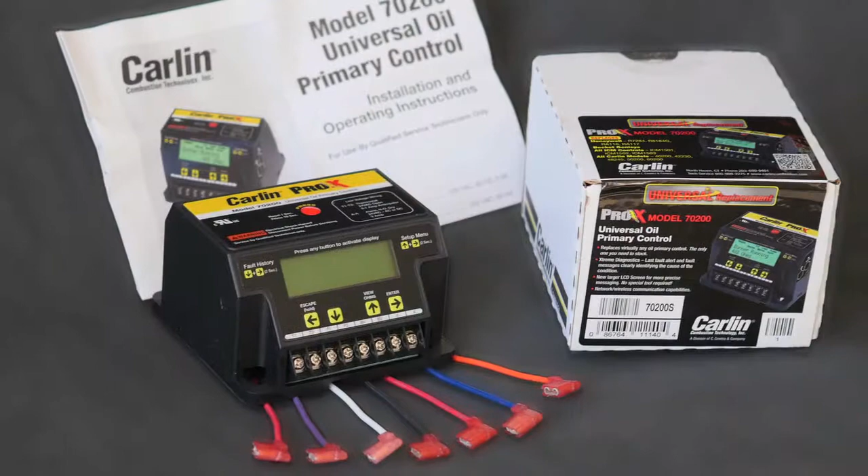Now that we have installed the ProX 70200 on our burner, we will review the setup. The state-of-the-art control is universal and self-commissioning right out of the box to fit most oil burners with and without oil solenoid valves. When the ProX 70200 is powered for the first time, an on-screen question will appear.

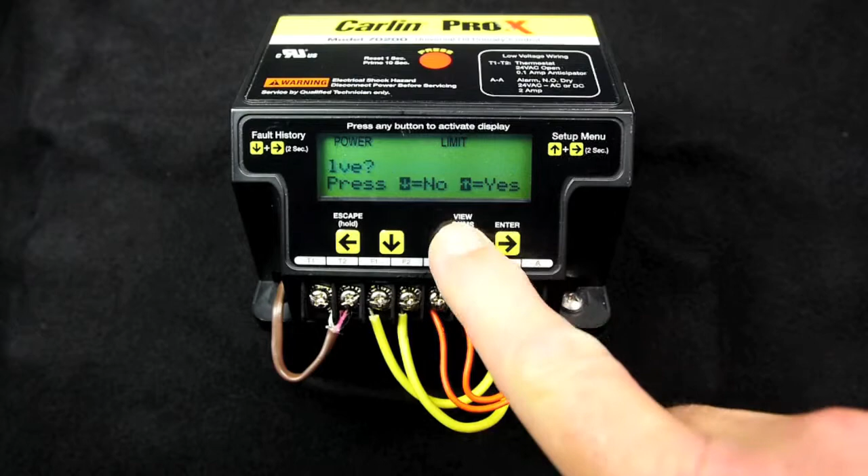Does the burner have a solenoid valve? You answer this question based on the type of equipment you connect to. If you answer yes, the ProX configures itself for pre- and post-purge. If you answer no, there will be no pre-purge and no post-purge, since oil burners without oil valves cannot purge. The single question and answer on power up will provide enough information for the ProX to self-commission.

This procedure is only required for a replacement unit. A ProX 70200 that is pre-mounted on a burner is already programmed for that appliance and may differ from the default settings. For any changes and custom applications, we will review the simple and easy setup right now.

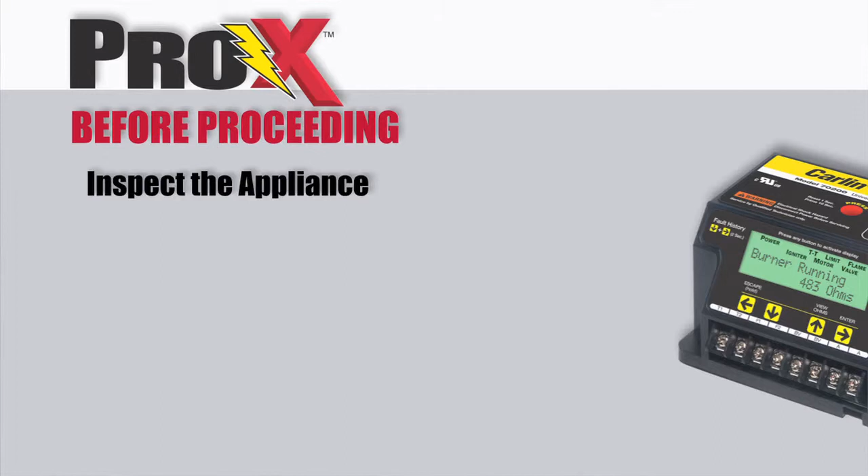Before proceeding, it is important with all equipment to read and understand the instructions. Be sure to inspect the appliance and perform all appliance and burner manufacturer checks before starting the system. Do not start the burner if the combustion chamber contains oil or oil vapors.

If the CAD cell senses flame, the ProX 70200 control will remain in standby until the CAD cell no longer senses a flame. The ProX 70200 has 11 customizable features. A chart of these features can be found in the installation and operating instructions, which is included with every unit. Note that the default settings are shaded in gray.

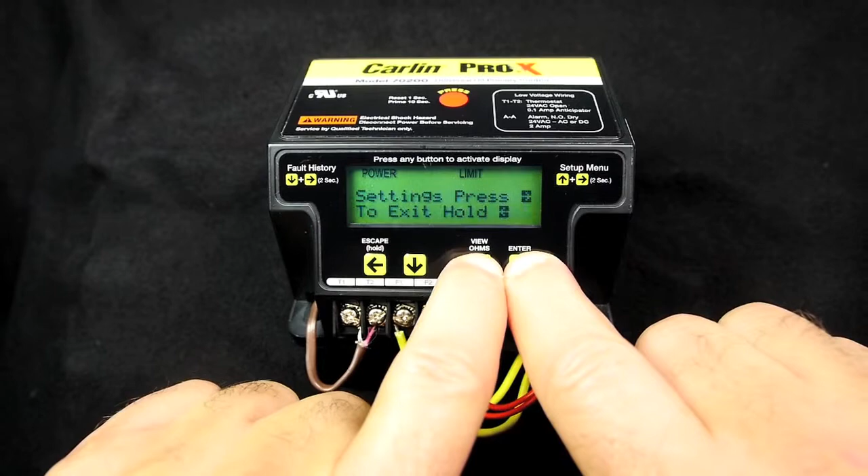Programming the ProX 70200 primary control. To enter the setup mode, simultaneously press and hold the up and right arrow buttons for 2 seconds. This displays a message on the screen that instructs you to press the right arrow key again to continue into the settings mode, or you press and hold the left arrow key to exit. If no key is pressed within 60 seconds, the screen will return to its previous mode.

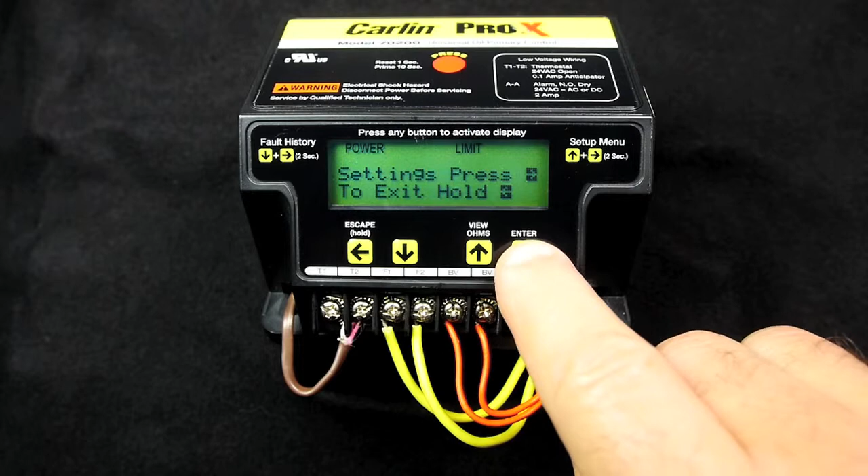Let's press the right arrow key to enter setup. Once in the setup mode, you will navigate by using the arrow keys. Use the right arrow button to view the settings mode options. Use the up and down arrow keys to navigate through the settings. The screen will display the option on line 1 and the current setting for each option on line 2.

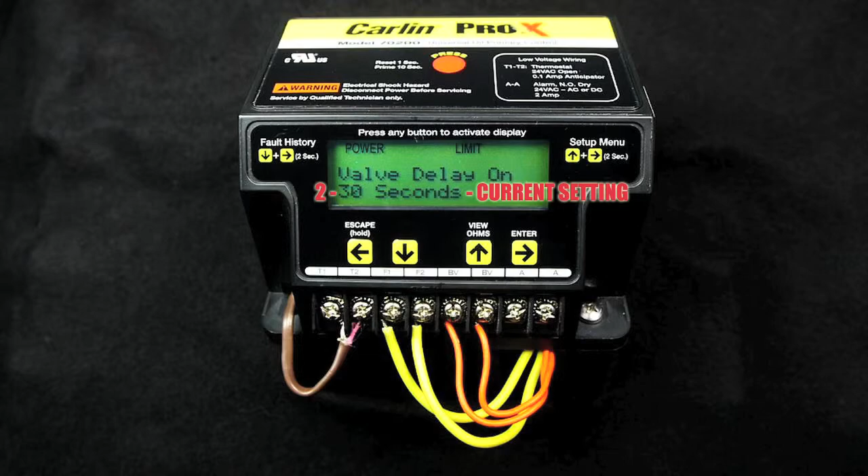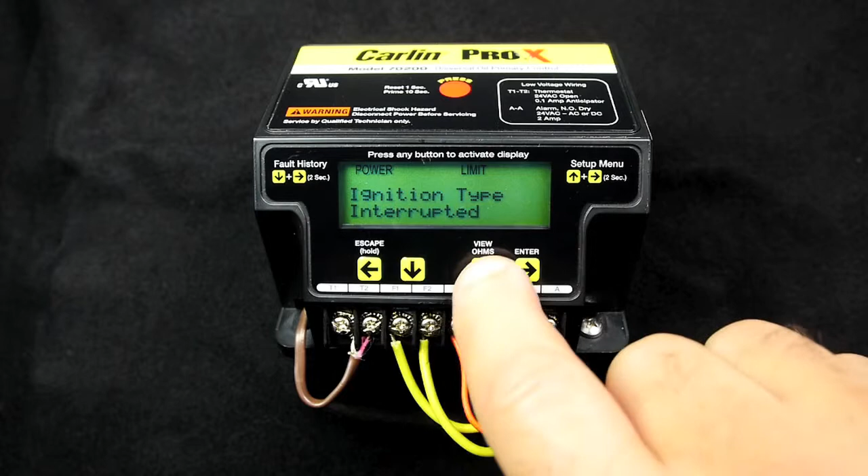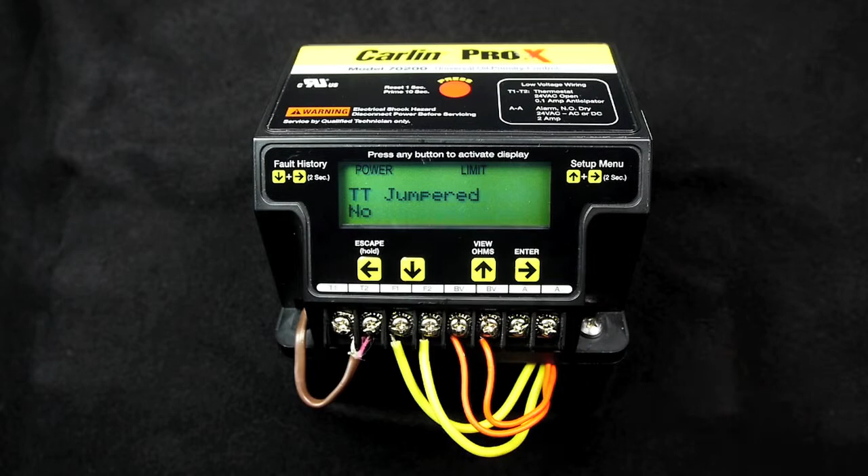To change any of the option settings, press the right arrow button to select the desired option, then use the up or down buttons to scroll through available settings. Once you make your choice, press the right arrow button to accept. When the word entered appears on the screen, that change has been made. You may continue scrolling through the options or exit the setup menu by pressing and holding the left arrow key.

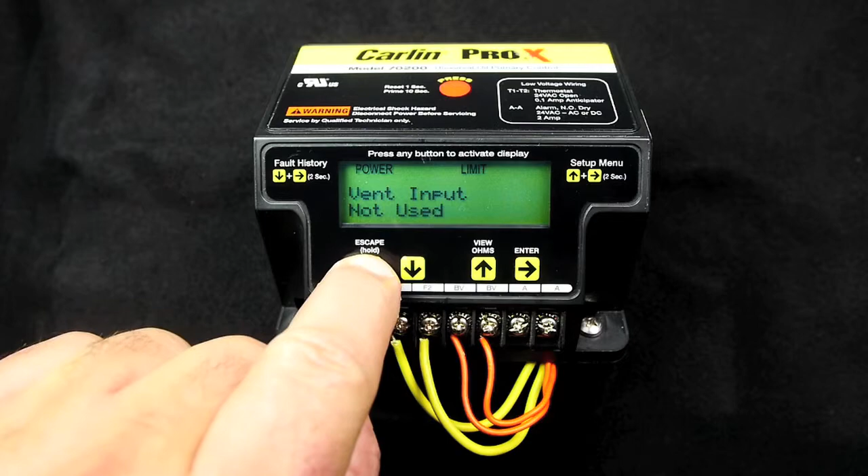The ProX 70200 default settings will accommodate most burners with an oil solenoid valve. The factory defaults are shaded in gray.

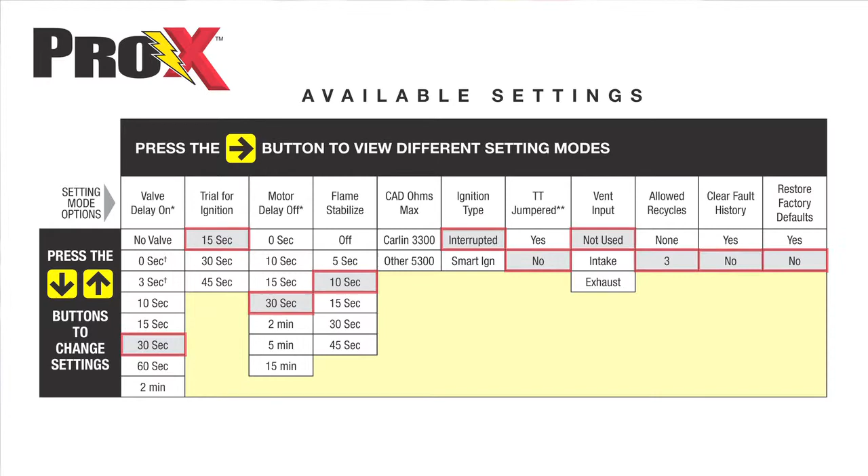The first mode option in the setup is valve delay on. The setting refers to the time period the motor and igniter are on prior to trial for ignition. Some refer to this as pre-purge. The default setting is 30 seconds. This option is not available if you selected no valve during the initial startup.

Trial for ignition, referred to as the TFI, also known as the safety timing. This is the flame establishing period. The default setting is 15 seconds. Other options are 30 and 45 seconds. Do not use 45-second TFI for oil burners with a firing rate of 3 gallons per hour or greater.

Motor delay off. This is the time period the motor is on after the call for heat is satisfied. Use this option to allow for the evacuation of combustion gases from the appliance. Some refer to this as post-purge.

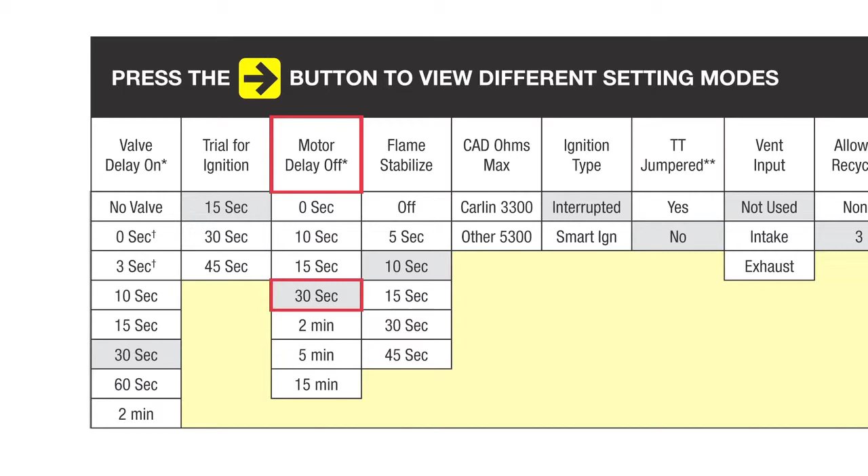The factory default for motor delay off is 30 seconds. This option is also not available if you answered no during the initial startup. Programmable motor delay off is very useful when replacing primaries on direct vent applications that most often have an extended post-purge cycle. If there is a call for heat during motor delay off, the burner will cycle back to pre-purge.

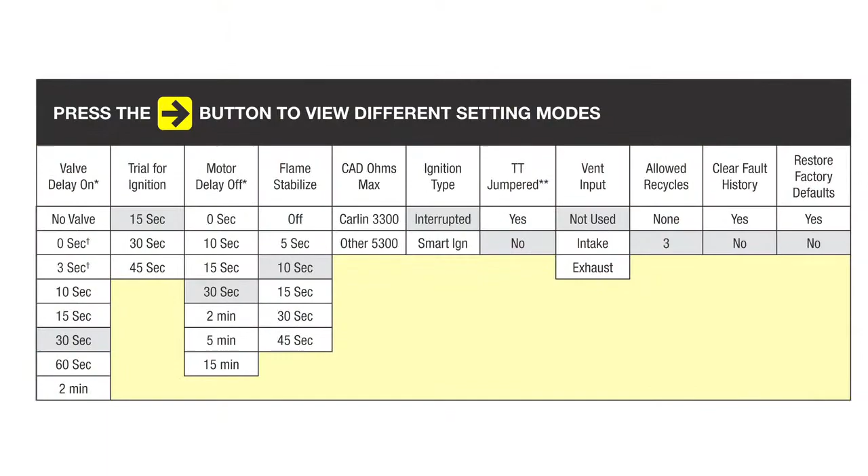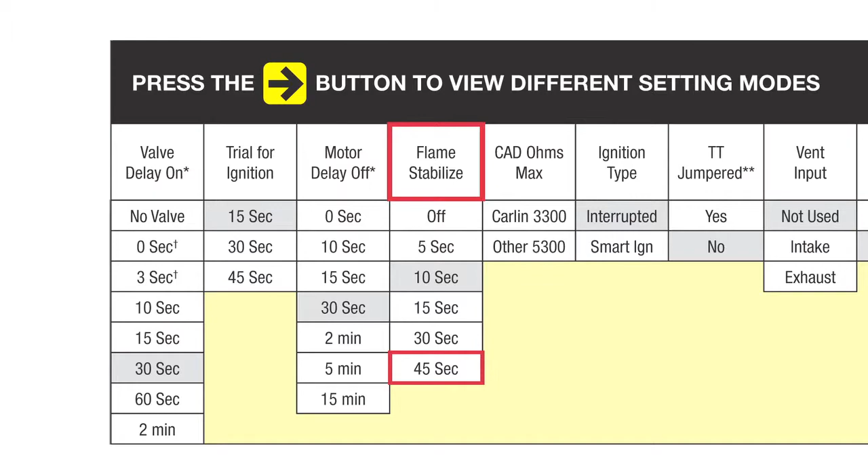Flame stabilization option is the time period after TFI that the igniter remains on. It is an added igniter time to assist in stabilizing the flame. Up to 45 seconds may be added. It is very useful in cold oil situations and cold start applications. Flame stabilization can prevent nuisance shutdowns. It is important to note that this is not an extension of TFI. You're only adding more time to the igniter on cycle.

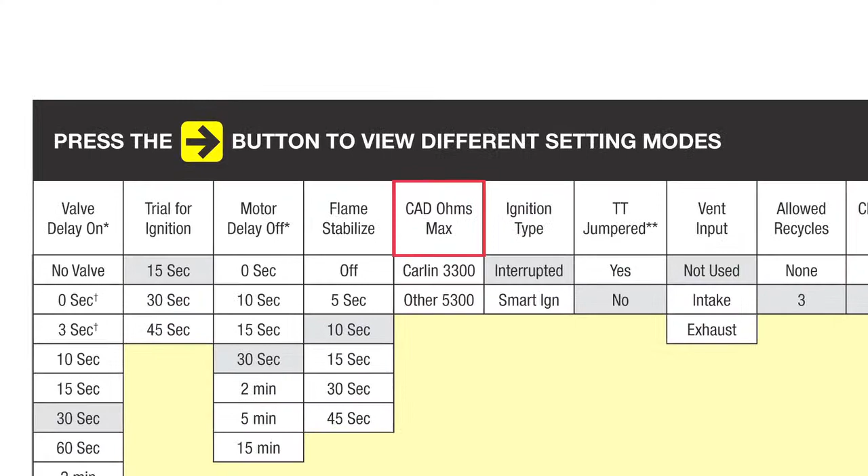The next option, CAD ohms max, is a feature used when the ProX 70200 is connected to a burner that requires a higher resistance for the CAD cell to operate. Most burners and all Carlin burners will use 3300 ohms.

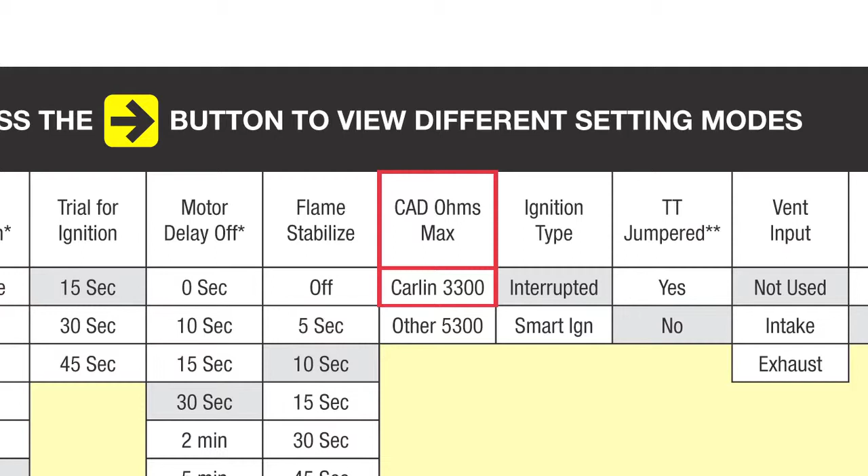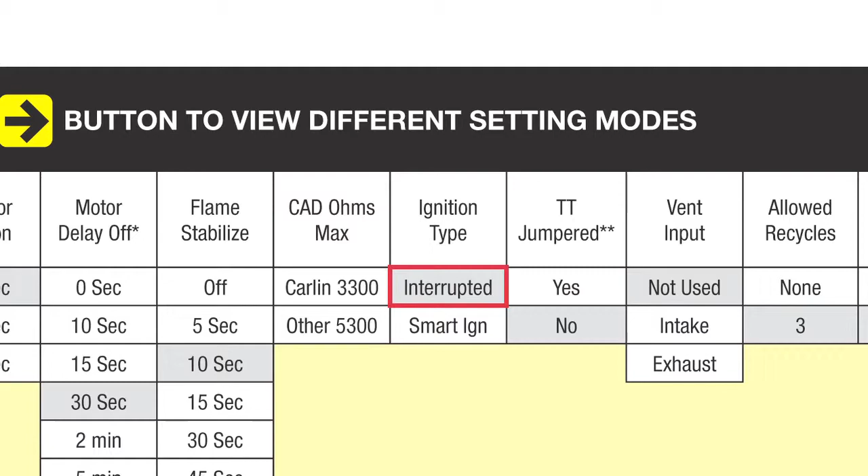Following that is ignition type. There are two options, interrupted and smart intermittent. In interrupted mode, spark is turned off after TFI or flame stabilization. With smart intermittent, in the event that the flame is lost at any time after the trial for ignition period, the Pro-X will immediately shut down the burner and recycle after 60 seconds. Following this recycle, the ignition will operate in intermittent mode for the next 10 cycles. Following these 10 cycles, the Pro-X 70200 will revert back to interrupted duty and will remain in interrupted duty until another recycle event occurs. The factory default for ignition type is interrupted.

The TT jumpered option allows T1 and T2 to be jumpered by the software program without the need for a physical jumper. The default for this option is set to no. It is important to know that if you set this option to yes with the limits powered, the Pro-X will exit the settings mode and enter into a call for heat cycle.

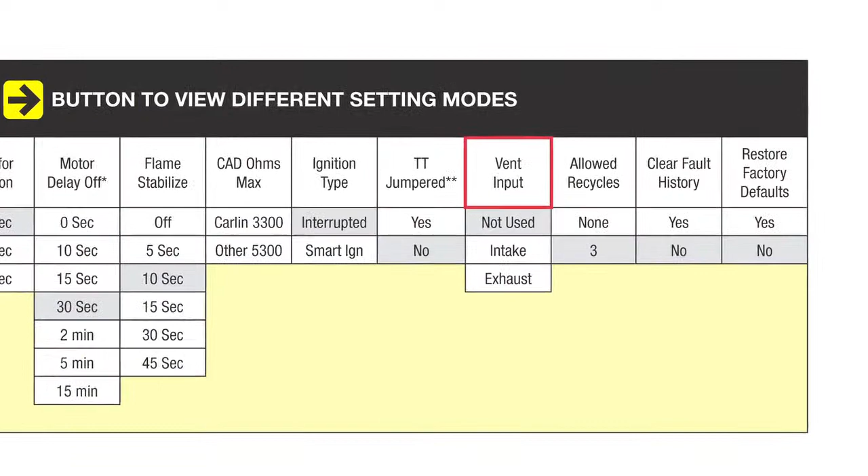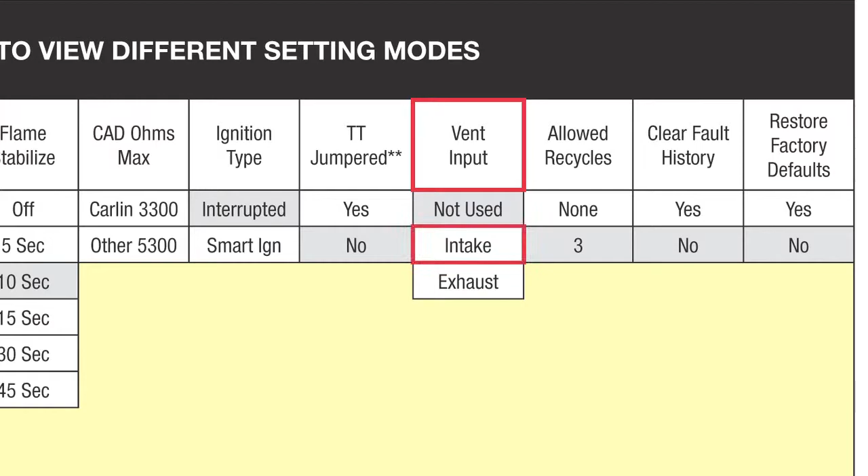Next is the vent input option. This option works in conjunction with the BV terminals, which stands for block vent. The vent option on the Pro-X 70200 can be configured to detect a blockage of combustion air entering the burner or to detect a block flue. If this option is set to intake, the BV terminals must be connected to a Carlin combustion air proving system known as the CAP system. The CAP system is designed to monitor outside combustion air. If the air intake becomes blocked, the system will allow for a safe burner shutdown.

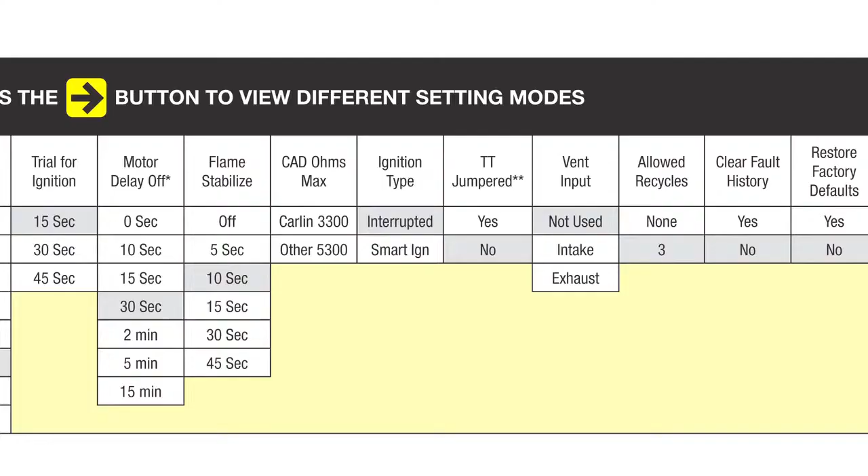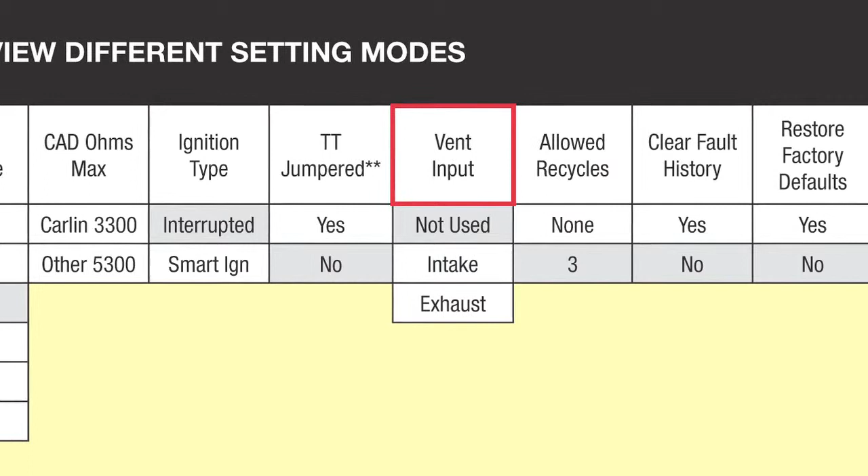Conversely, if the vent input option is set to exhaust, a thermal spill switch or pressure switch in the flue must be connected to the BV terminals. Built-in delays and recycle features add to the usefulness. This feature by default is off and must be set for use.

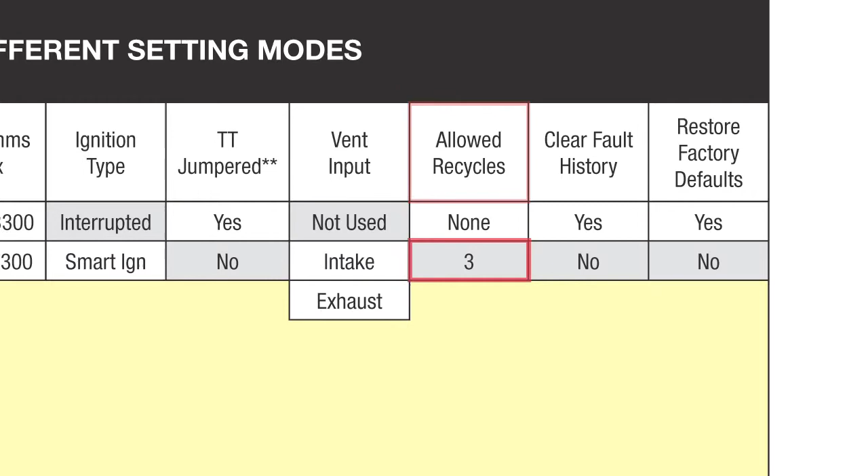Following that is allowed recycles. This is the number of recycles allowed during any single call for heat. A recycle is defined as a shutdown when the flame signal is lost, but not during the TFI cycle. After a brief pause for 60 seconds, the Pro-X will recycle and attempt to reestablish a flame. This option can be set to 3 or none. The default is 3.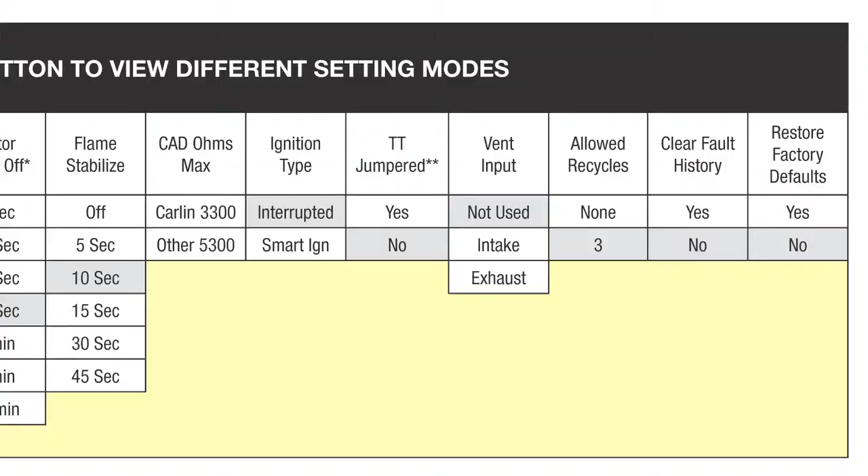Any attempt by the burner to exceed the recycle limit will result in a lockout and a fault message, recycle limit exceeded. The clear fault history option allows you to erase all prior burner faults in memory. Select yes to erase the fault history. Clearing the fault history allows you to erase the old fault data and start fresh.

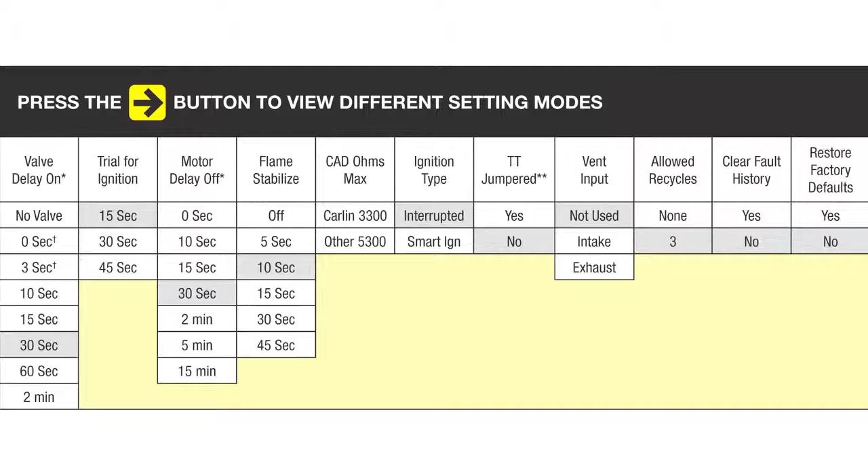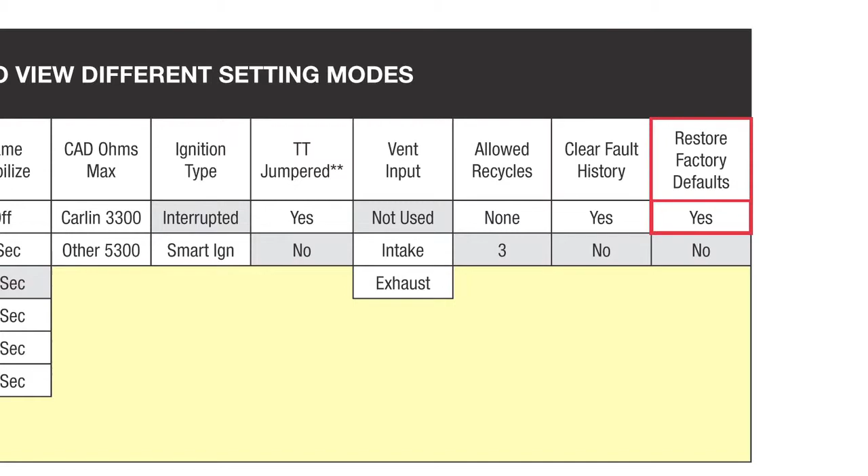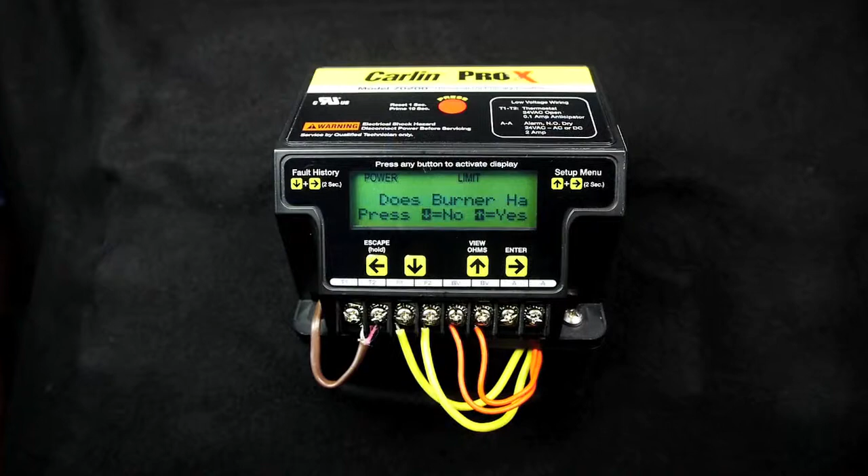Factory defaults. This option is set to no. If you wanted to revert back to the original setup, you can change this option to yes. If you opt to restore to the factory defaults, the Pro-X 70200 will revert to its factory settings program, and the question, does burner have a solenoid valve, will display on the screen.

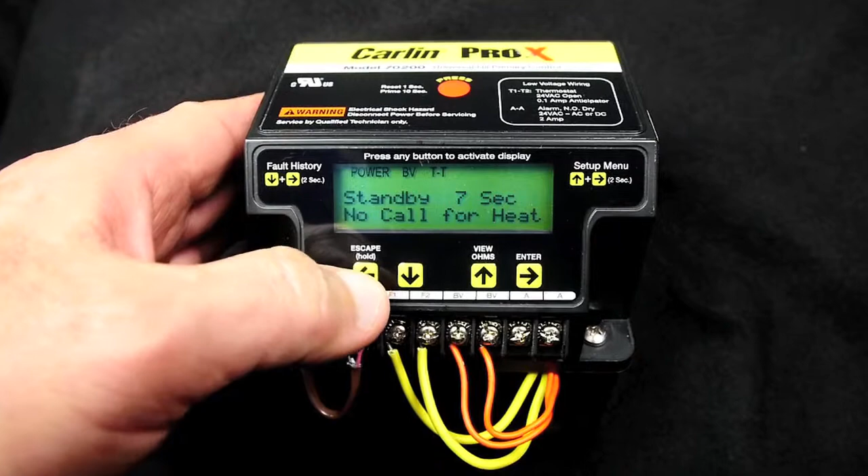Now press the left arrow button for 3 seconds to exit the setup mode. The screen will return to its previous mode, in this case, standby, no call for heat.